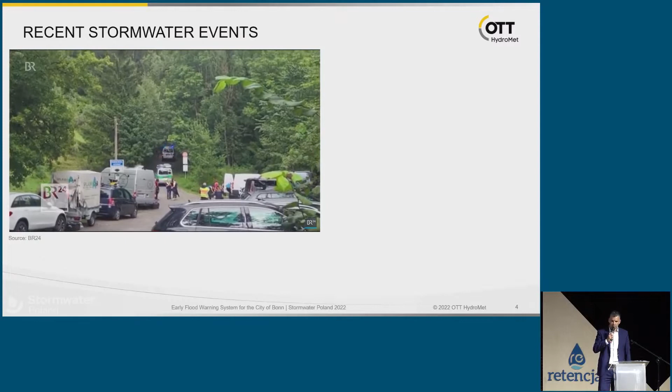Also there, just 3 weeks ago, a group was caught by surprise by insanely rising water levels. They did not get any alarms, and unfortunately you see here the rescue activities. 2 people have been injured, and one person only could be found dead after this event.

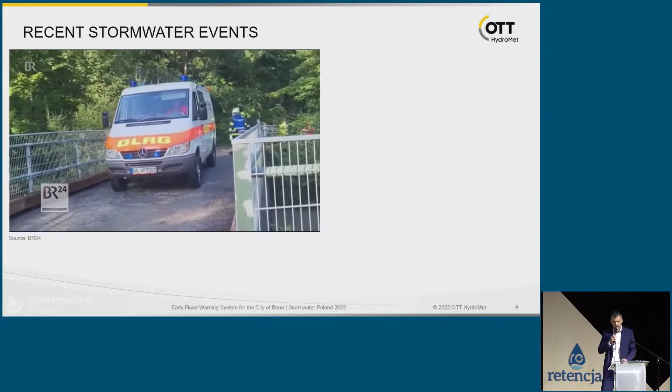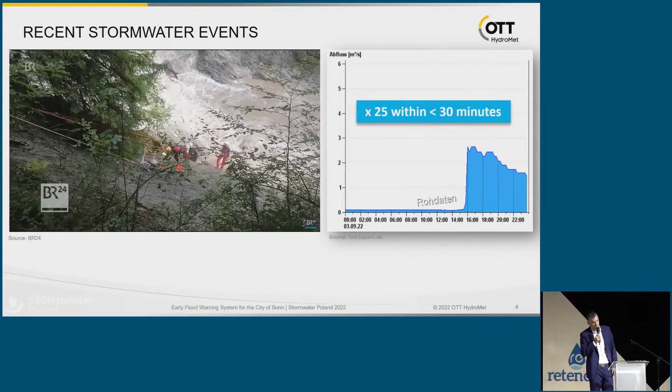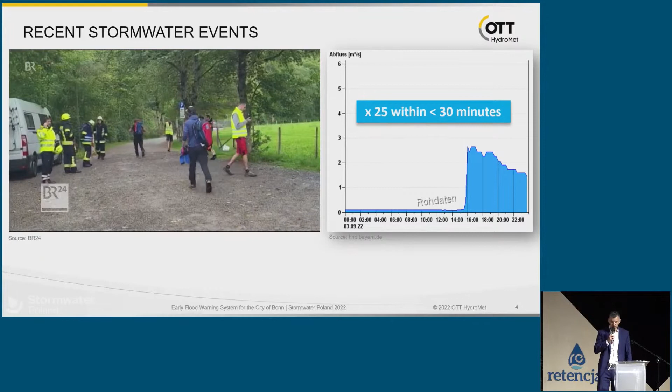What happened you can see here on the next slide. It was really some actually not too heavy rainfalls, but it's a small catchment area of the gorge, and it fully hit this catchment area, and the rainfalls caused a rise of the flow of more than 25 times within less than 30 minutes. Of course, in this time frame it was just not enough time for the groups that were doing the canyoning in this gorge to get to safety.

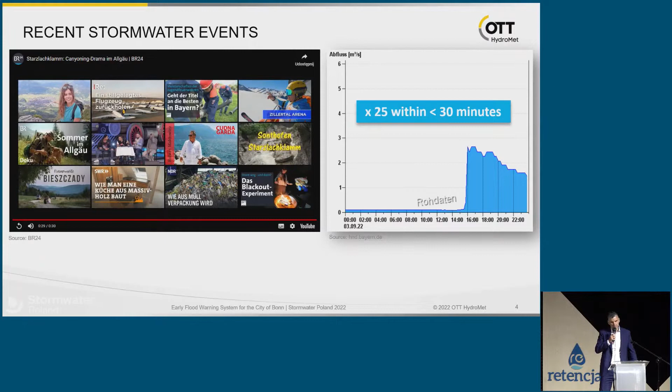These examples are, of course, sad, but I believe they give us motivation. We cannot prevent every disaster, but at least we can try with all our possibilities. I work for a sensor and measurement company, so my key message, as always, is you need to be prepared, you need to monitor, you need to measure, because you can only manage if you measure. Well, this is the key message here.

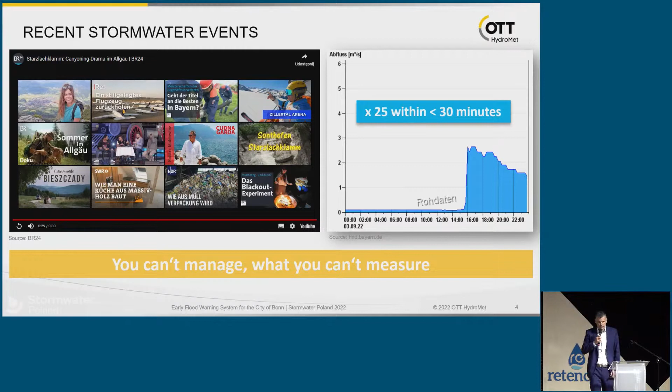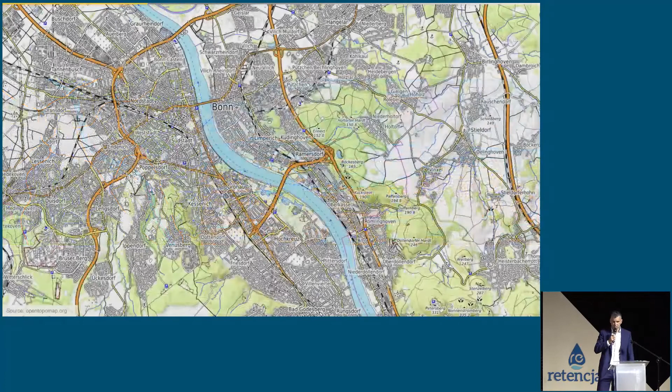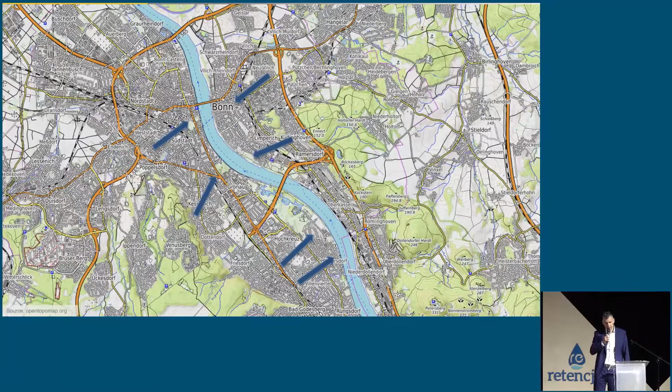You see the green areas are hills. It pours down from the hills, crosses densely populated areas, and these water courses really look peaceful in normal situations. What you can see here on these pictures are really small water courses, but they can turn into raging torrents during stormwater events. This happened, as was also mentioned, 4 or 5 times in the last 5 years in the city of Bonn.

Well, finally, it accelerated the desire to be better prepared and to establish an early flood warning system. And this is what the city of Bonn has realized as of today.

It consists mainly of two parts. If we speak about the monitoring network, the first part is the water level monitoring system, and the second part is the precipitation monitoring system.

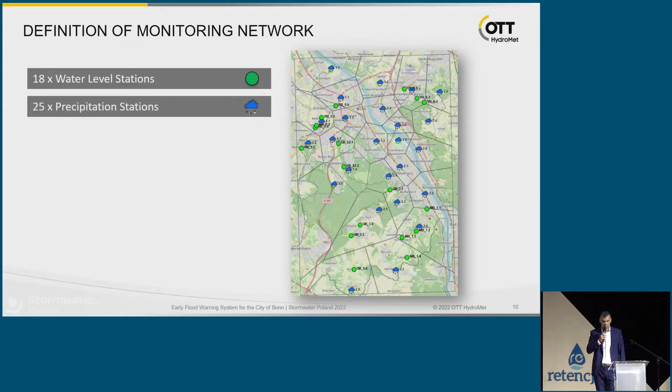Here's a map of the monitoring network as it exists today. You see the city of Bonn, the Rhine, and the green circles representing 18 water level stations, and the blue clouds stand for the 25 precipitation stations distributed over the whole area of the municipality of Bonn. So how did they get there?

Of course, you have to take some considerations if you speak about the elements of a flood monitoring network. You have to think about sensors, which technologies do you want to use, data loggers, communication, software solutions. How do you want to visualize and analyze the data, and how do you want to disseminate the information that you derive?

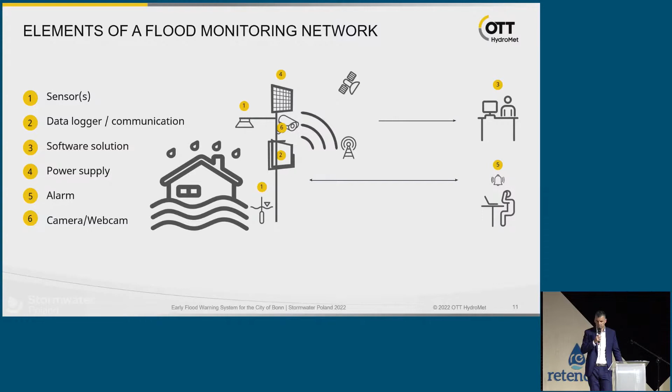Technical things like power supply, alarm thresholds, and also in this case they also work with cameras, webcams. This is important to understand that these possibilities exist and can help you get a good visual overview about the critical infrastructure in your network.

So what has the city of Bonn done? Firstly, speaking about the water level stations, they have chosen a radar level sensor because it has no contact to the water itself. It is the only sensor that is mounted out of the water, so it cannot be damaged during a flood situation.

Usually the bridges in municipal regions are not too high and not too big. Therefore the installation is quite simple, and the maintenance can be done out of the water. So it's a very secure sensor to provide water level data.

Of course, you always have options, and one of the classic sensors in hydrological application is the pressure probe, the hydrostatic pressure probe. They also used a couple of those in their network. Also easy to install, very accurate. Of course, it needs to be mounted in the water, not out of the water. Very accurate, very cost effective, and also very reliable and commonly used water level sensor.

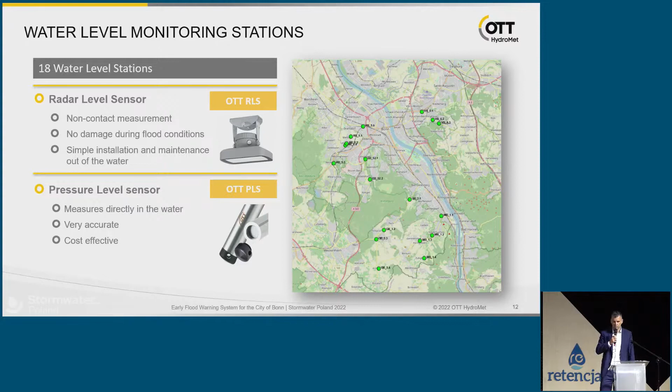Then, of course, one critical element is the communication. How do you get the information across? How can you remotely communicate, remotely transmit your water level and precipitation information? Usually here in these areas in Europe, you can rely on GSM providers, so usually use GSM modems, 2G, 3G, 4G for data transmission, and those networks have proven quite reliable in critical situations, because this is of course when they need to work.

But yeah, as I said, most of the flood events have shown that the mobile networks keep running during critical situations. Options would also include, if you have internet connections, broadband, LAN connection, you can use that as well for data transmission. Or if you want to add an extra level of security to your data transmission, you could even work with satellite data transmission.

Power supply, it's also quite obvious. Whenever possible, use mains supply. If it's not possible, if it's too expensive, then of course you can also use solar panels, because our sensors and data loggers have a very low power consumption, so it's no problem to supply them with solar panels of a rather small size.

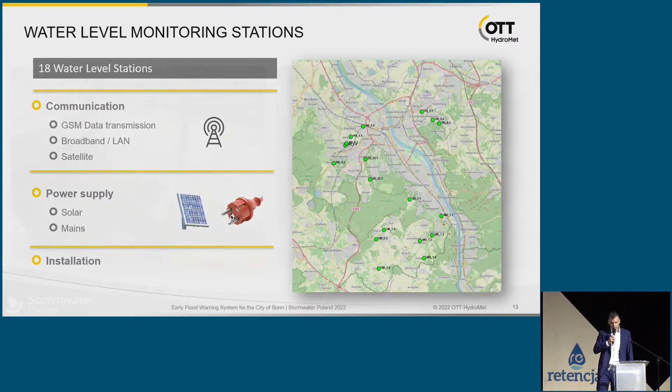I just want to show installations as they really have been realized in the city of Bonn. So here are two water level stations. You see on the extension arms the protective cover of the radar sensor. The radar sensor is mounted inside and looks vertically down to the water surface and can continuously record the water level information.

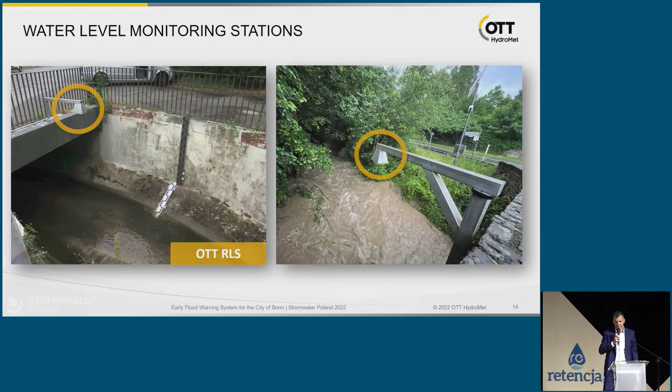Okay, then speaking about precipitation, also here we as a sensor company have different solutions, and the city of Bonn has chosen basically the best-in-class solution, the state-of-the-art technology, which is a weighing precipitation sensor, namely the OTT Pluvio. This is basically nothing else but a bucket that sits on a scale, and the content of the bucket is weighed — if precipitation falls into the bucket, the weight increases, and this can be recorded and evaluated as precipitation. So it has no moving parts, it is very accurate, it requires almost no maintenance, and it can measure solid as well as liquid precipitation.

So it's really a very reliable device that is used here in Poland by many municipalities already. And yeah, it's just a good device.

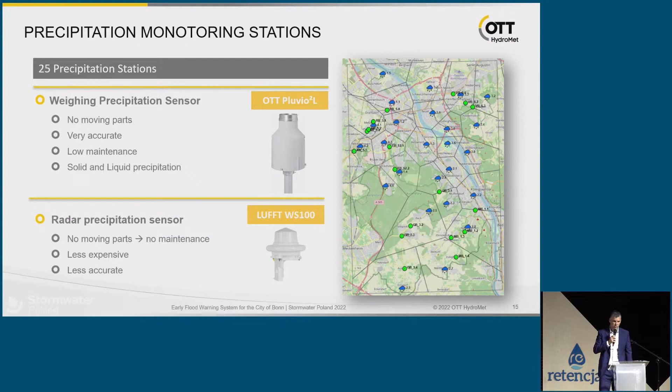Of course, we also have options here, maybe less expensive but also less accurate. For example, a radar-based precipitation sensor that scans the air above the sensor. It has a radar beam looking upwards, and if there's precipitation, if there are drops, some of the energy is reflected. From that signal, you can calculate a rain intensity that can be used for rain monitoring networks. As I said, not as accurate, but especially if you want more stations, more spatial information about your rain events, you can use these sensors and distribute them all over your catchment area.

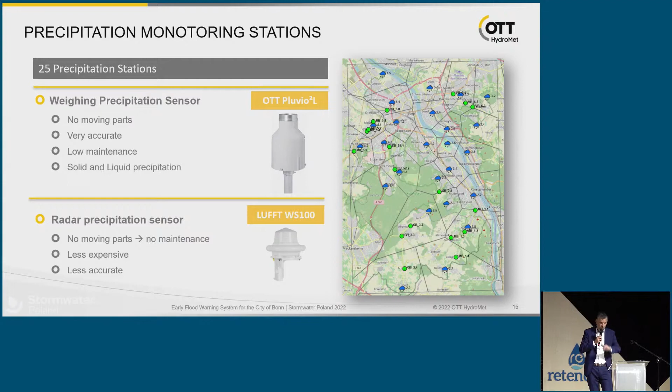Also here a few pictures. So rain stations usually aren't very exciting to show. It looks like a milk can from the Allgäu, from the Alpine regions, but it's a highly sophisticated sensor.

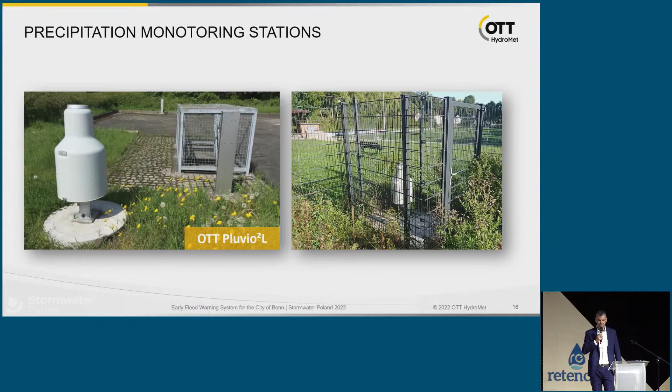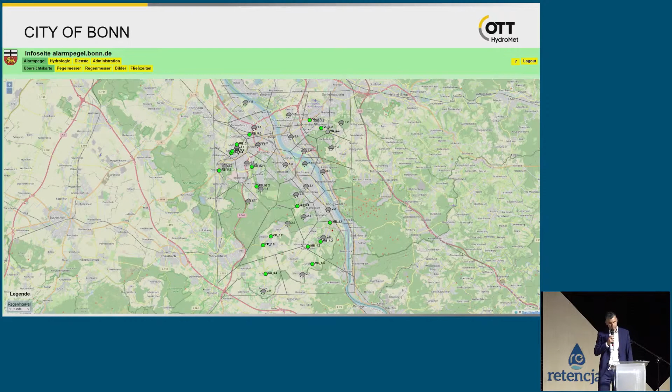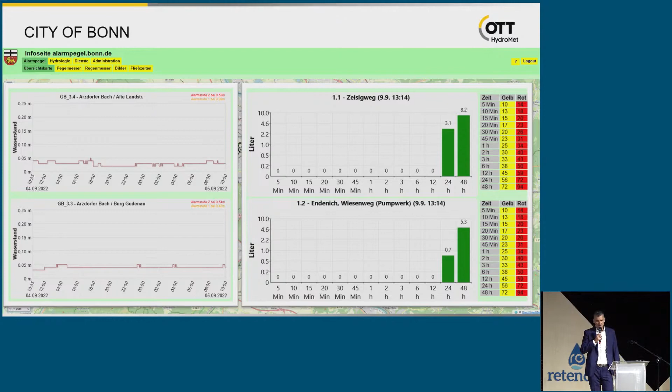Okay, so what do you do with the data then? The city of Bonn has created its own web page, which is not open to the public, so it's not accessible for everyone, but only for the experts of the city of Bonn. And here they have access to the water level data as well as to precipitation data on different timescales. They also have access to pictures.

Now I want to speak briefly about the webcams they are using, because they have identified critical points in their network, like narrow throughlets, culverts, and other kinds of infrastructure. They want the ability to check remotely if the situation is still okay. Therefore, a few of the stations have those webcams installed.

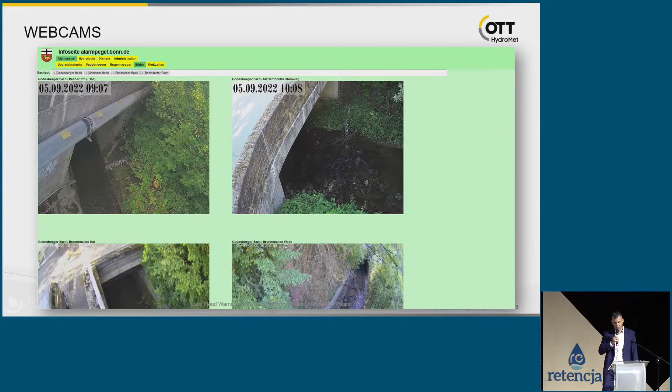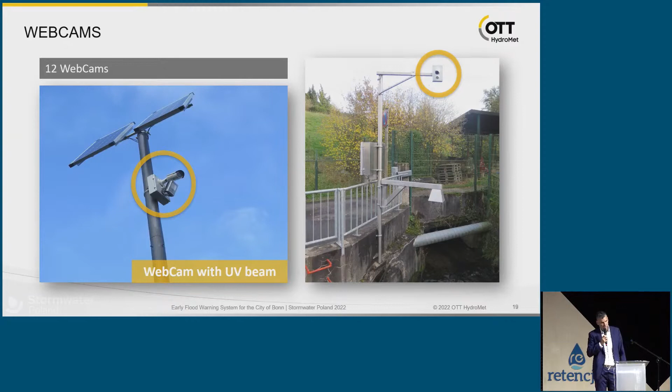The pictures are transmitted - here are pictures from the webcams. They are connected to the data logger, and the data logger is responsible for transmission of the pictures to the web page, to the cloud-based web solution. They also have a UV beam that allows good visibility during the night. And if you enlarge one of these pictures, you can see what you can see.

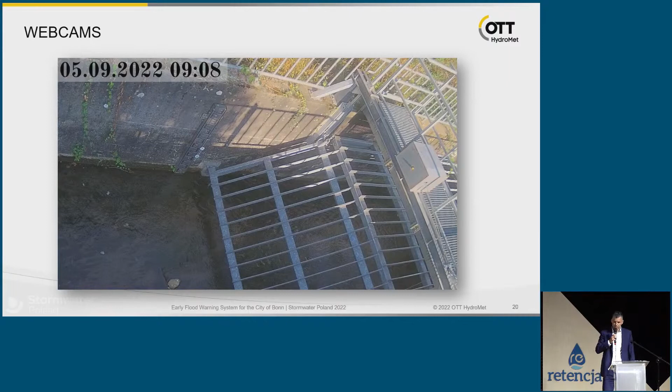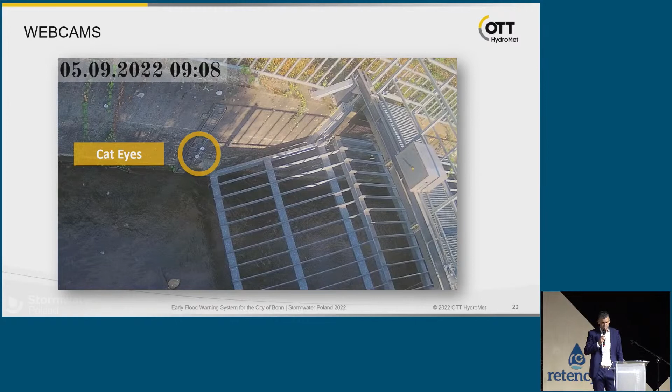So here's a critical infrastructure, and I want to turn your attention to these cat eyes. They have found a very simple and easy solution. These cat eyes are basically the physical representation of the critical thresholds at this station, so they can see if the thresholds are crossed or not and how the situation is. This works pretty well during nighttime too, with low visibility, because they have the UV beams and the cat eyes are reflecting. So during the night you also have very good visibility of the situation. A very smart solution.

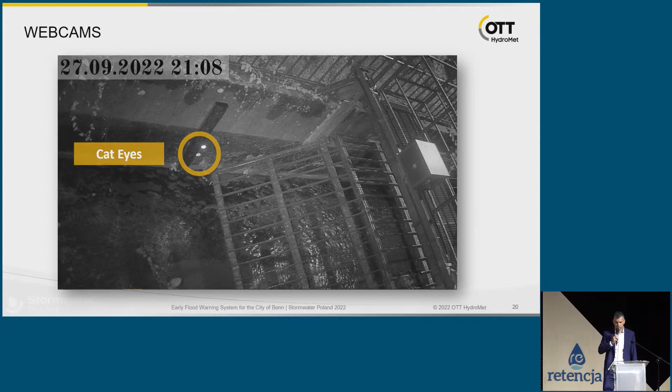And they can coordinate the firefighters, the people from the municipal works service, to send them out to the critical points and check, or apply sandbags, and just coordinate the necessary mitigation measures to manage such stormwater events.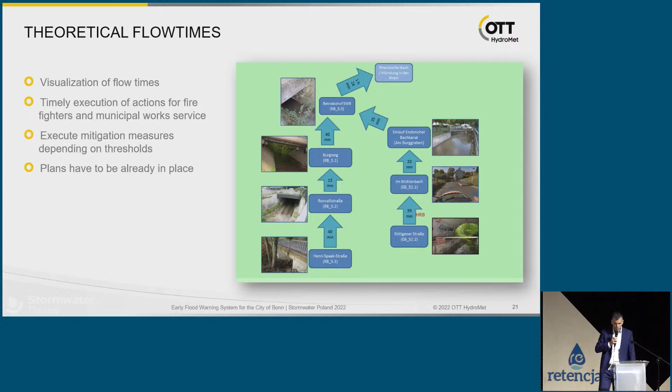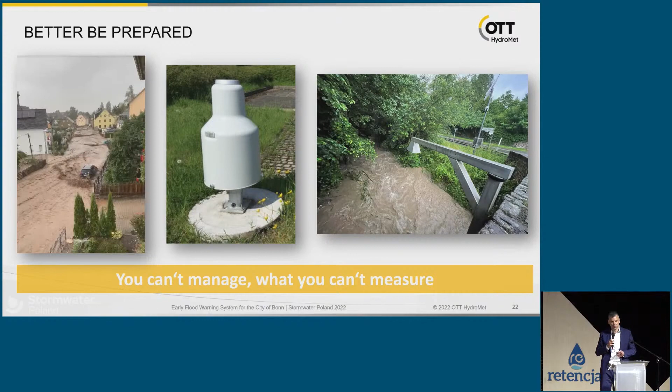Okay, this basically brings me to the end of my talk today. I think it's a very good example of what the city of Bonn has realized. They are now better prepared for stormwater events because they have a monitoring network in place. They measure, and thus they can also manage - that's the key message for today from my side.